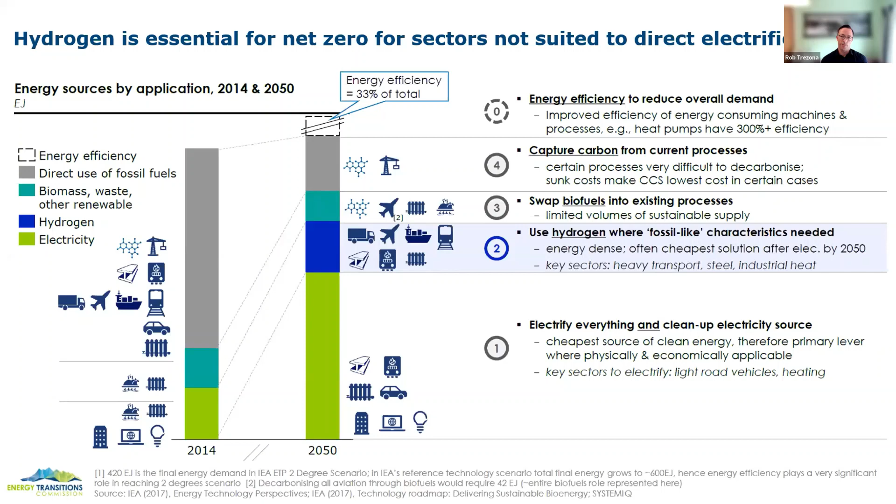And this chart shows a scenario, if you look at the middle there, 2050 energy use, where the single largest sort of energy vector is renewable power, but hydrogen there in the dark blue is a very large part of the future energy economy.

So in terms of sectors, there are three or four really key sectors where there is no plausible alternative to hydrogen if you really want to decarbonize. Those are steel, ammonia, methanol, shipping, and probably aviation.

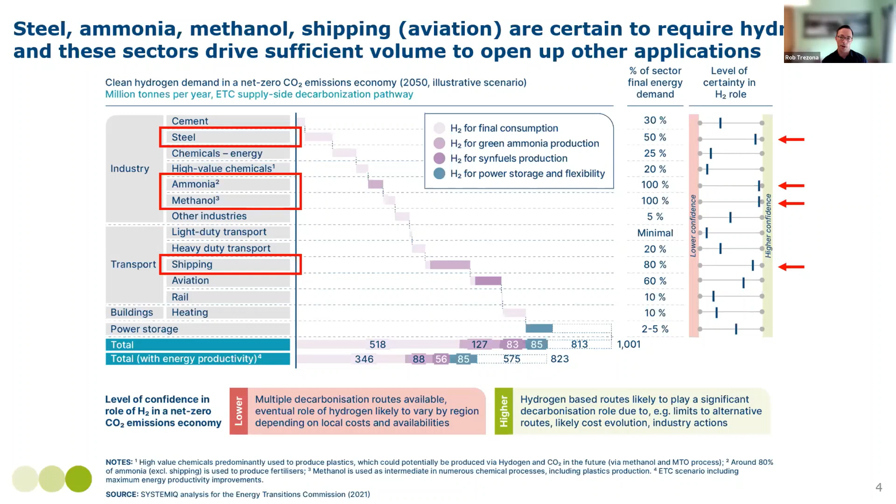Those four sectors are large, representing gigatons of emissions today. The reason hydrogen is now interesting in other areas is that if you were to decarbonize those four sectors with hydrogen, you generate a hydrogen economy of sufficient scale that the costs come down and hydrogen becomes attractive in other sectors as well.

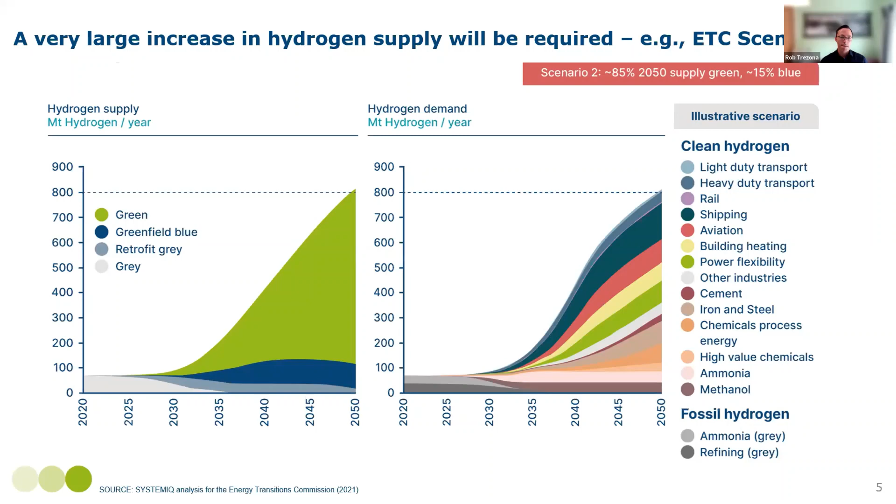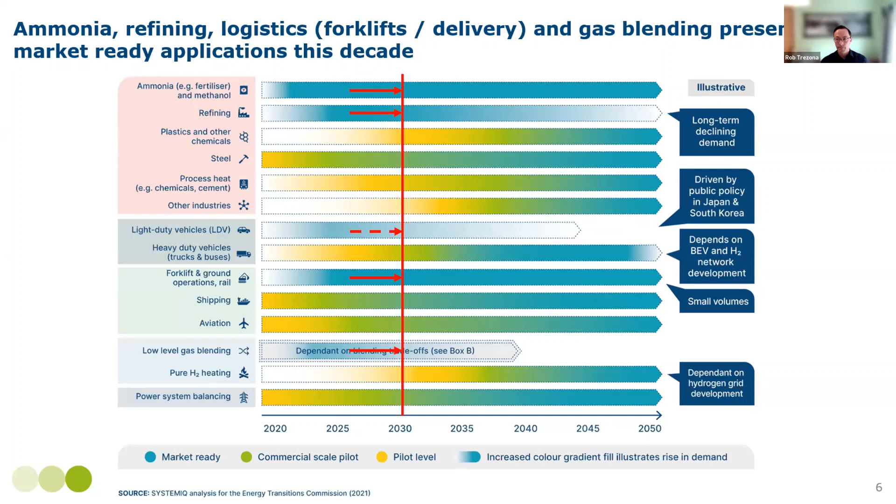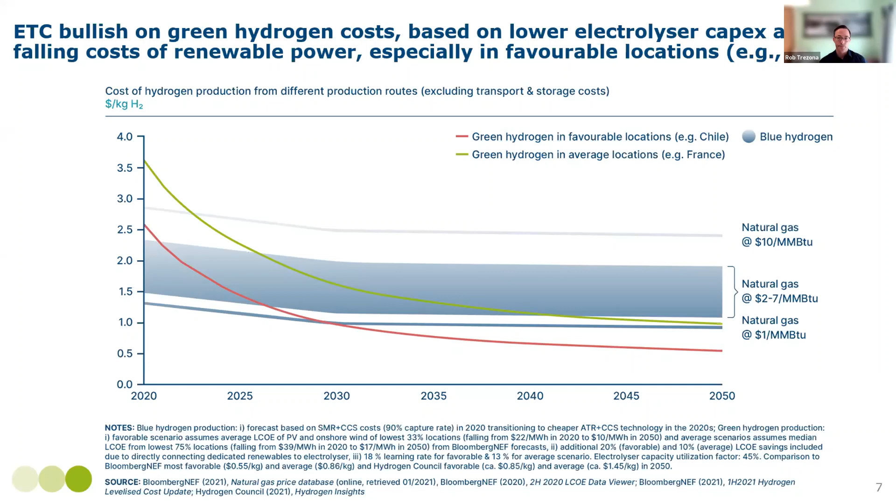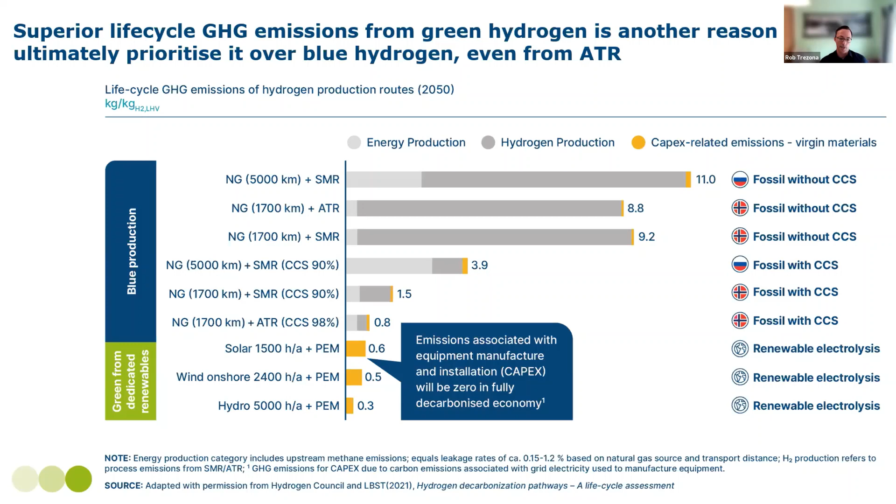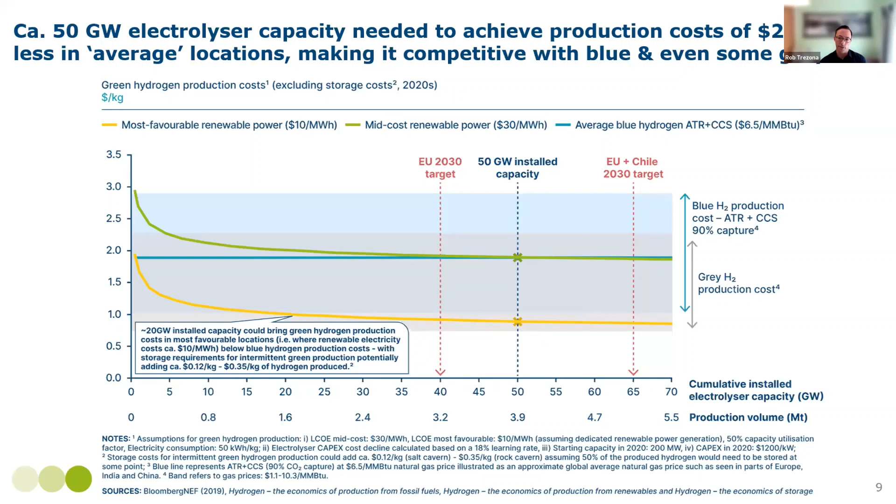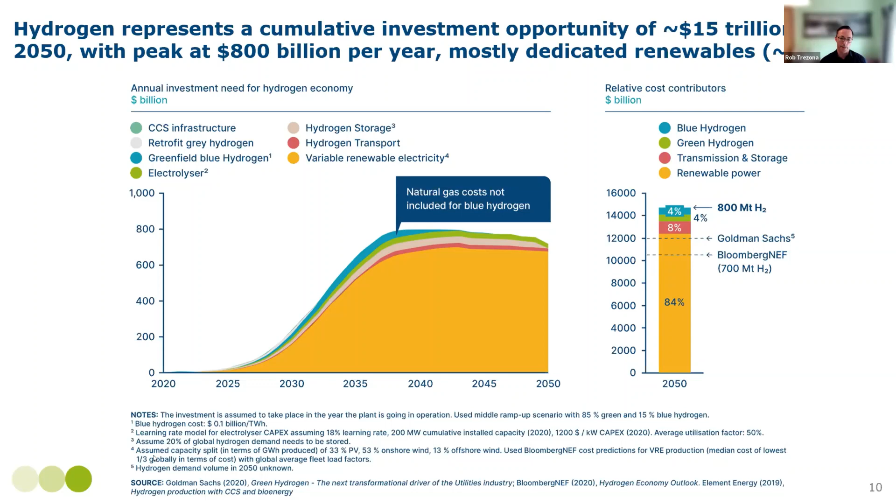In terms of the investment opportunity, this is another scenario showing for the overall economy - ramping hydrogen production from 60 to 800 megatons by mid-century, what does the actual investment requirement look like? The cumulative figure is about 15 trillion US dollars, peaking at around 800 billion per year. If this happens, this is clearly a huge new asset class, new type of infrastructure, and that's why people are so excited about hydrogen as a new player on the scene.

So really the takeaways are that hydrogen has become important now because of net zero. Not every application, as Jamie said at the beginning, is going to scale. We think people underestimate quite how cheap both renewable power and batteries will become. We're long, as the ETC view and also with IP group, on green hydrogen, although there's clearly a role for blue. Green costs are surprising me - they're coming down faster than I expected. There's going to be a huge investment requirement, and really this is new plant, so a lot of the electrolyzer production is greenfield.

Then really some thoughts on early sectors. Ammonia - today ammonia is desperately important for fertilizer, a huge quantity of greenhouse gas emissions. That is low-hanging fruit for hydrogen substitution. Also injection into refining, logistics, potentially grid gas blending, and light-duty vehicles in Asia.

So thanks for that. And with that, I'm going to hand over to Nigel, who'll talk about the role of hydrogen in energy storage.

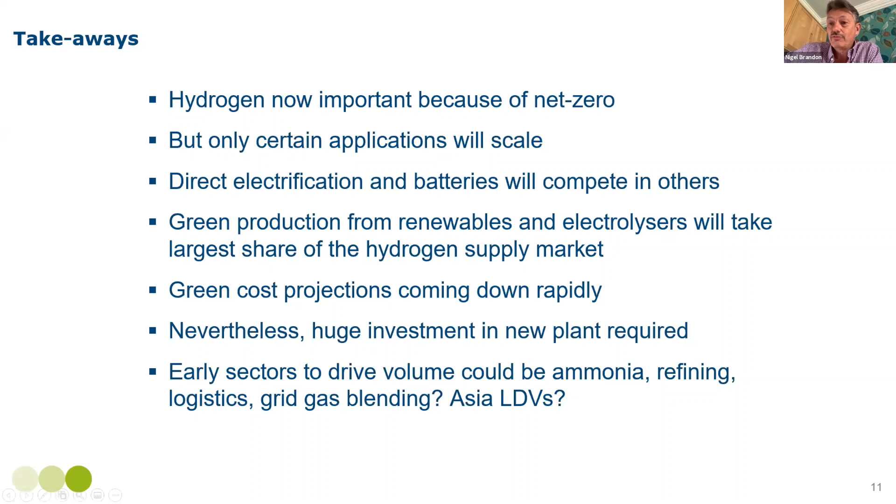Thanks, Rob. I just checked - Rob, I've switched my video and everything on okay, right? You can see and hear me? Yeah. Okay, so if you can move on, that'd be grand.

So Rob, thanks very much. I guess I'm giving this talk wearing 2 hats. Firstly, as one of the founders of an energy storage company called RFC Power, and I shall talk a little about the technology and approach we're taking with RFC Power, very much addressing the longer term energy storage market. I'm also giving this talk, I think, wearing my hat as head of the UK's hydrogen and fuel cell research programme, and happy to take broader questions around hydrogen in Q&A as appropriate.

So next slide, please. So,

Thanks, Rob. I'm grateful to my colleague Grant Wilson at the University of Birmingham. Grant and his team produced these very helpful flow pictures which show the flow of energy through the UK energy system. Obviously this is a UK specific comment, but it applies to other places as well. I want to talk about this because it brings into sharp relief some of the challenges and requirements for technologies that deliver flexibility into the energy system, of which energy storage is one important example.

The red line at the bottom of that - so firstly, what does the plot show? It shows gigawatt hours per day on the vertical axis over time. Interesting to see some of the impacts of COVID and lockdown in the UK on transport fuel demand, for example, which is that central grey line. The red line at the bottom is the flow of electricity through the UK energy system, which is actually the smallest flow of energy that we have through the system. It's, however, a very important opportunity for decarbonisation, to use low carbon electrons to decarbonise other parts of the economy.

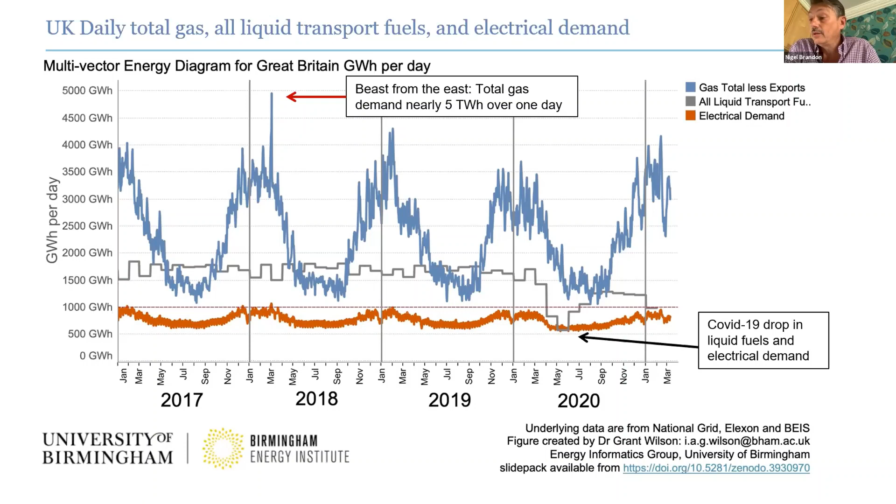This is some work my colleague has done at Imperial College, Professor Goran Strbac, and he's looked at the impact of increasing wind penetration into the UK electricity system. We will rely extensively on wind for our renewable sources in the UK.

There are two plots on here to take away. Firstly, the right-hand side says if you increase the amount of wind on the system, unless you do something about the ability to balance the system better, you will need to increasingly curtail that wind at times of peak wind generation and minimum demand. And that becomes an expensive investment in wind generation.

Or you need to invest in the infrastructure to allow those peak loads to flow through the system. But then you end up with a decreasing use of that infrastructure, and therefore a more expensive infrastructure being used less of the time, with the associated costs.

His work suggests a market in the UK alone for flexible technologies, which would include storage but not only storage, in a post-2030 UK scenario of greater than £8 billion a year, and that grows over time as we move closer to a net zero system.

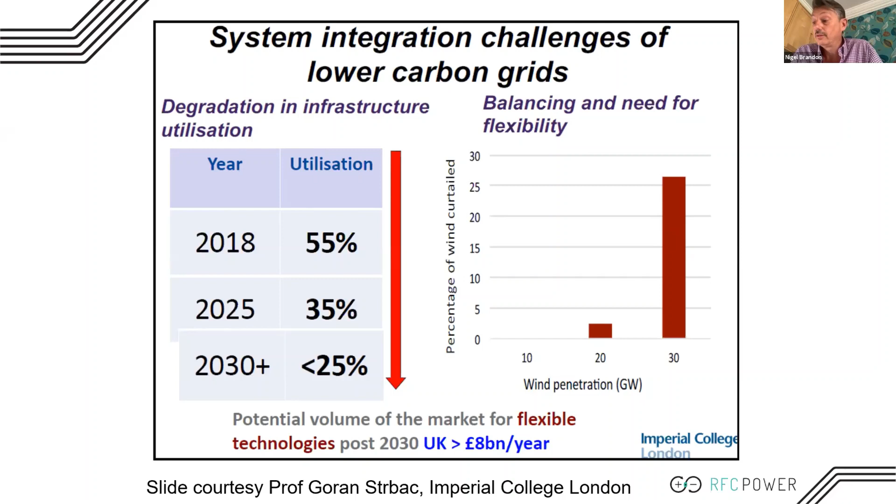Next slide, please. The other feature of this, in particular looking at increasing reliance on wind for our electricity generation, is that it's well known that in Northern Europe, we get a low in the winter in terms of wind generation. And how you choose to balance and mitigate that is a really important question.

This again is some work from Goran's group, and it looks at the impact of the number of weeks with low wind against, if you were to balance that entirely with hydrogen, how much hydrogen would you need to store. If we look at the 1 week case there, let's look at the limit, you can see that it needs about 10 terawatt hours of storage.

Now, just to put that into perspective, I don't know how many of you listening on the call have ever been to the Dinorwig pumped hydro station, so-called Electric Mountain in Snowdonia, a purpose-built, large-scale pumped hydro facility in which a 1 million cubic metre cavern was excavated inside a mountain.

That provides 9.1 gigawatt hours of storage. So we would need 1,000 of those to deliver the 10 terawatt hour energy storage just for 1 week. And clearly, I think that demonstrates the challenge.

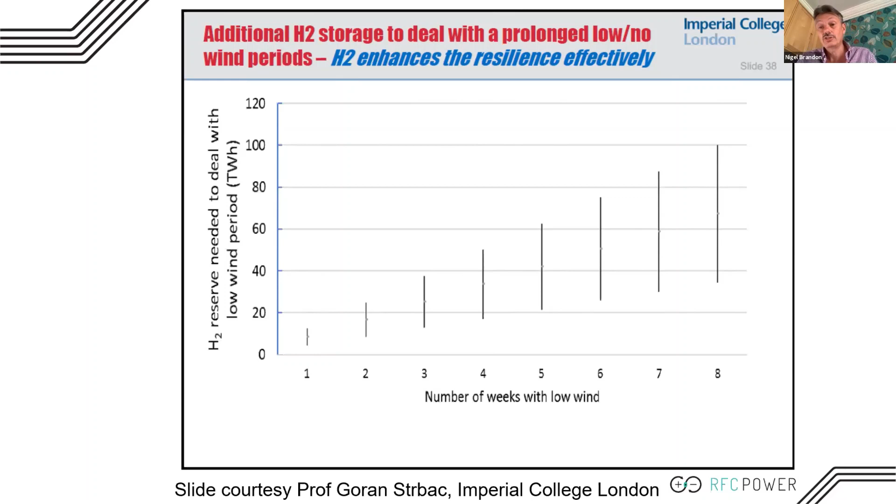There has been a really good German study looking at the capacity for underground storage of hydrogen, using solution-mined salt caverns, which are a lot easier and lower cost to manufacture and produce. They estimate that the UK onshore and nearshore hydrogen storage capacity is 2,000 terawatt hours, so far more than we would need to deliver this sort of storage. So that's an interesting question there, and an opportunity for hydrogen in longer term storage.

Next slide, please. And if we come down a bit in terms of our storage duration, and start to think about not weeks of storage, but hours of storage, this is a study from the Californian Energy Storage Alliance, looking at the 2045 situation in California, which is predicated on the Californian target of 100% zero emission power generation by 2045.

They say it's very clear that, given that would rely extensively on photovoltaic power, this would need to be met by a 10-hour energy storage system. So again, it's a longer term energy storage system than we currently need, which is often more in the scale of minutes to an hour or two.

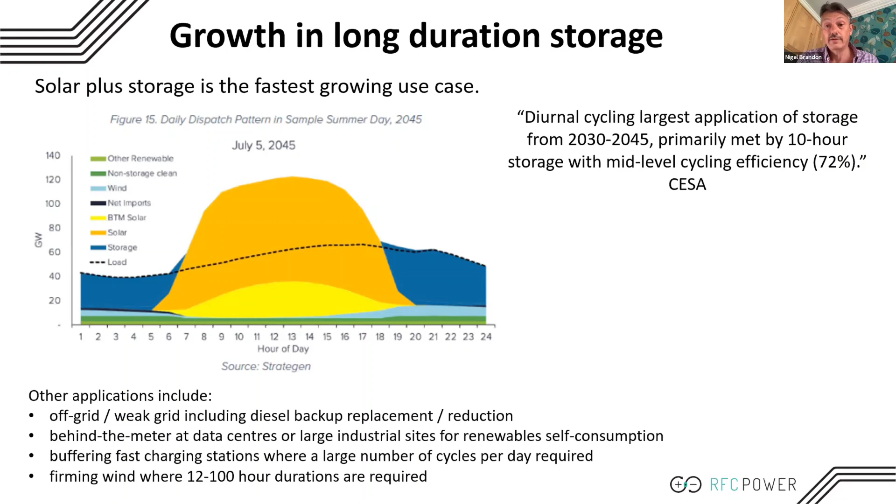Next slide, please. So this is from Bloomberg New Energy Finance. There's a lot of forecasts here which talk about the increase in the market for longer term storage, somewhere north of 4 hours. For example, these 10-hour backup storage systems for diurnal backing up of solar, or even into the longer term, more strategic weeks of storage to manage intermittent shutdowns in wind supply in the winter.

Okay, next slide. So RFC Power is a company that's playing in this space. I'm not going to tell you a lot about it, but happy to follow up with questions or pick up subsequently. RFC Power are developing a new type of flow battery.

Flow batteries are a technology well suited to multiple hours of energy storage. Effectively, a flow battery has a device not dissimilar to a fuel cell or an electrolyzer at its heart, and it produces a redox couple - an oxidized form of a chemical species and a reduced form of a chemical species - that it stores in tanks. If you need more energy, you need a bigger tank, and tanks scale quite cost effectively. So as you need more and more hours of storage, this is a good way to go.

What we've developed with RFC Power is a new chemistry. It uses a hydrogen manganese, so-called hybrid flow battery. We don't use vanadium, which is the most commonly used species in flow batteries, both because vanadium is expensive and because most of it comes from either China or Russia, so there's a supply chain concern. Instead, we use manganese using a patented chemistry. Manganese is the fourth most used metal after iron, aluminium, and copper. It's widely available, globally sourced, and low cost. Indeed, the electrolyte is only about 1/10 the price of a vanadium system.

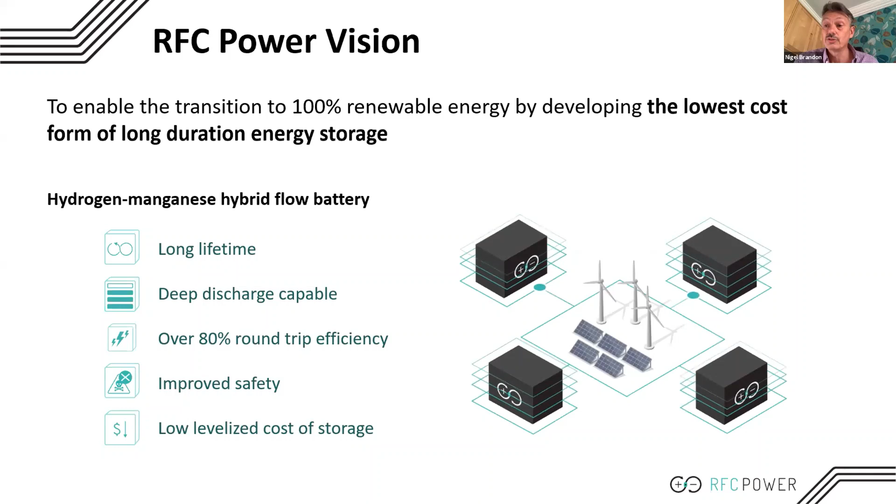It also uses hydrogen, so it can loop into the hydrogen system. One way of thinking about this: if you want to make hydrogen in an electrolyzer, which is about 65% efficient for low temperature electrolysis or about 90% efficient for high temperature electrolysis, and then convert it back to power in a fuel cell, perhaps about 60% efficient, the overall round trip efficiency is about 50% at best. If what you want to do is store energy, you can instead use a technology like this, which gives you an 80% round trip efficiency. Of course, that's not the same function as a fuel cell and an electrolyzer, but if the function of the device is energy storage, it's a far more efficient way to do it.

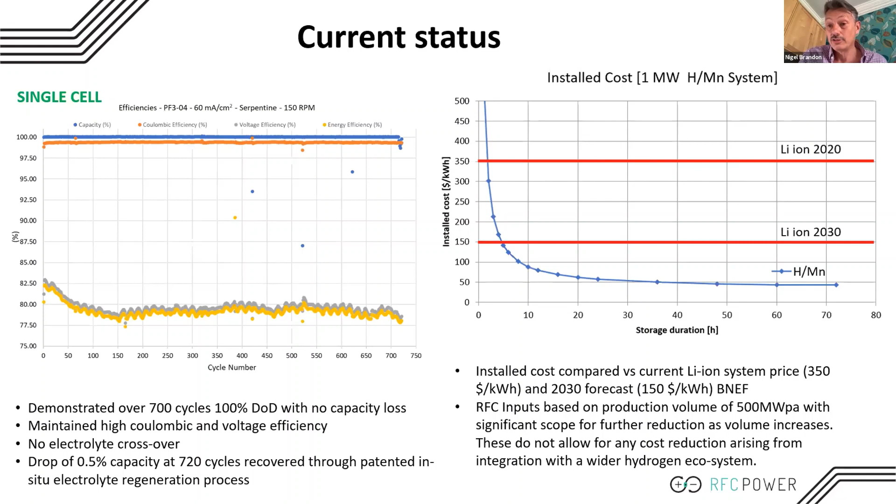Next slide, please. So this is RFC Power. Happy to take questions on it. It's addressing this very large emergent market in longer term energy storage. It does interface with the hydrogen economy as well, which offers additional benefits. We have a very broad and well protected IP set, and happy to talk about the business model as well. But Rob, I'll stop there because I'm over time.

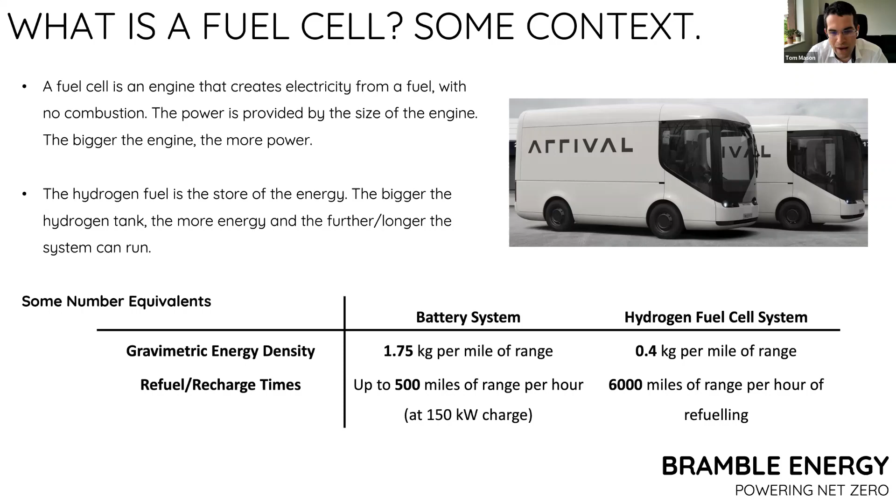So in mobility, you have these three mantras: range, weight, and cost. So give an example here of light logistics, recognizing what Rob said at the beginning about the uncertainty of where you use hydrogen. I think logistics is one of those scenarios where the uptime of that asset is very important, especially when you start considering the move towards next day retail and online shopping.

So the example given here is what Mercedes have been able to do with their Sprinter vehicle. Obviously it's very typically powered by diesel. They also produce one now which is powered by lithium ion, and you have a significant premium. You have a significantly lowered range from several hundred miles of diesel and fast fill-ups down to 95 miles of range - obviously changes seasonally - but you also significantly reduce the load capacity. Again, this is where fuel cells are favorable in all of those metrics: amount of range, amount of load carrying capacity, and we'll come to cost in a bit.

So refueling infrastructure is quite interesting. The amount of fast chargers - the charging infrastructure in the UK is growing very, very quickly. But in terms of ultra rapid chargers, so those 150 kilowatts and above, they're still very limited. We have less than 1,000. And when you consider that there are about 250,000 pure EVs on the road in the UK, I don't think anybody would really argue that the amount of infrastructure we've got is enough.

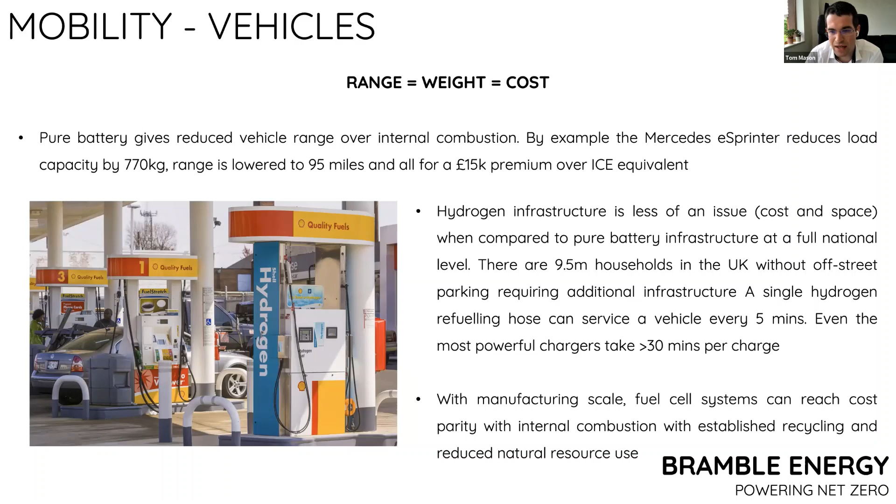So now I've got a couple of examples, one in aviation and one in marine, where it starts to put the challenge of electrification into perspective. So this is really about the advantage of hydrogen being where moving a higher mass over a longer distance is where hydrogen systems win over batteries. And a couple of numbers here.

So a 6-seater aircraft, very, very small, requires about 500 kilowatts of load. So when you start to look at the mass of batteries, you are limited then to the tens of kilometers of range. So even in Europe, that's not really enough.

When you start looking at much bigger aviation, more typical, a 737 uses about 7 megawatts of power at cruise. And so if you were to build a battery able to store that amount of energy to enable 1 hour of flight, say London to Edinburgh, London to Paris, or Amsterdam, you require about a 45-ton battery. And when the 737's gross takeoff weight is 56 tons, you can see that's just not going to work.

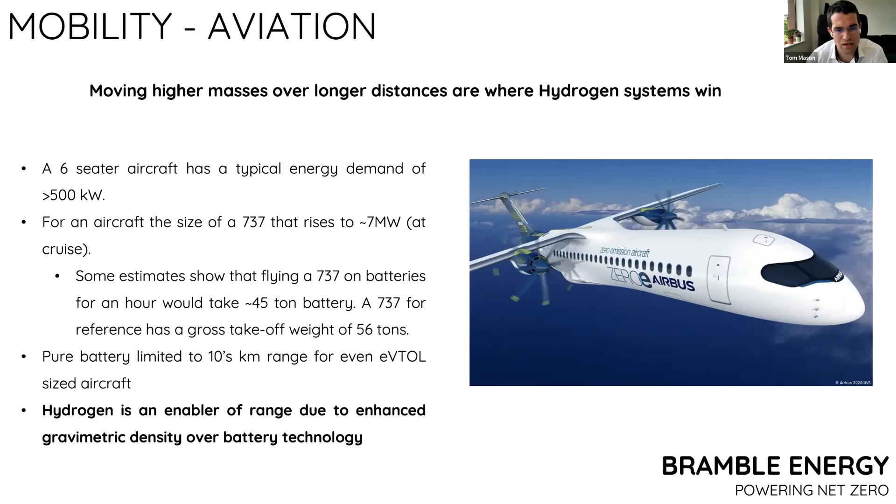And so that's where we start to see hydrogen being a real potential for decarbonising that power. So marine is where it starts to get even bigger. You saw from the ETC report that Rob showed earlier, marine is a particular example where hydrogen has a strong use case. If we look at a container ship like the one in the picture, the Evergreen that got stuck in Suez, they require about 80 megawatts, over 10 times the amount of energy required for aviation.

So from a typical trip from China to the UK, that would use about 60 million kilowatt hours of energy. You also then have the refueling, or recharging, part of that. A typical container ship of that size takes 3 days to unload, and that will require a 1.6 gigawatt connection. So again, these numbers are massive - it's more than 7.5 million UK homes, and more than any of the individual nuclear power plants in the UK can produce.

So again, it puts into perspective - that's for a single ship - the challenge of decarbonising that. Also, the asset life for marine is very, very long, and batteries are particularly challenged when it comes to decades-long asset lives.

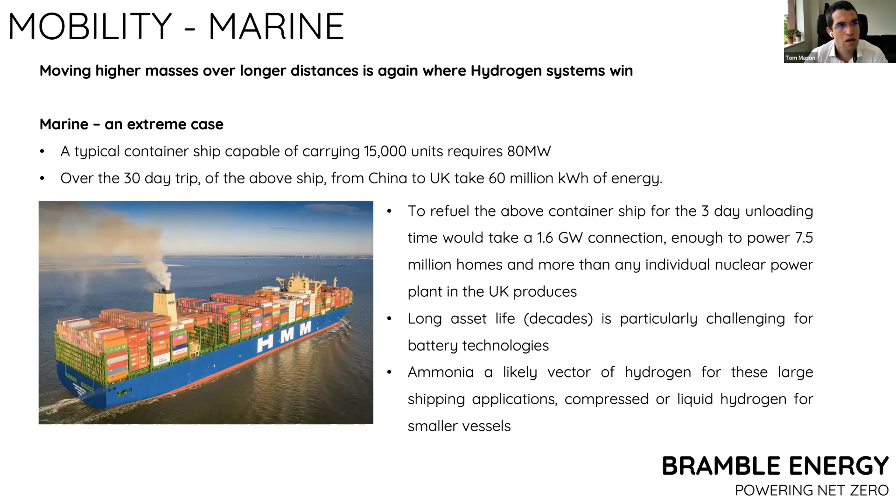So just to conclude, what do fuel cells need to be? The fuel cell is the engine for hydrogen. It needs to be scalable in manufacture. It needs to be cost effective, particularly over battery technology, but also internal combustion technologies. It needs to be durable, long life, and it needs to be easily integrated into form factors. And that's several of the advantages that Bramble Energy boasts in its PCBFC technology.

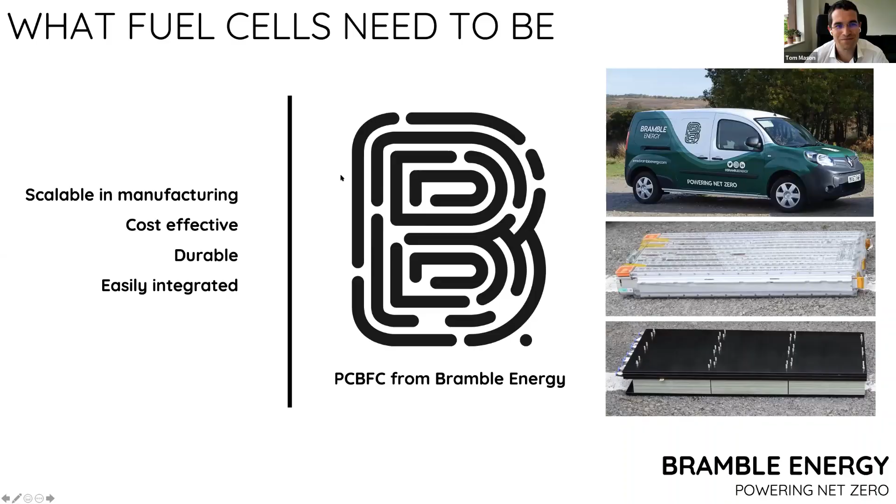Yeah, so pretty broad range of topics. I guess everyone knows Ceres Power from the fuel cell domain, but I just wanted to give you a bit of a preview of some work we're going to publish later in the year about industrial hydrogen and our work on electrolyzer technology.

In the interest of time, I won't dwell on who we are, but safe to say that Ceres has grown very rapidly over the last few years, and that's really been enabled by a very clear understanding of what our technology does, a very clear understanding of our business model, and the backing of some fantastic partners, people like Bosch, people like Weichai, people like Doosan, who've really committed to taking the technology forwards. And that's enabled us to take a step beyond fuel cells and start looking at the use of this technology for hydrogen production as well.

So we talked a lot about energy storage, energy systems in general, and particularly in the fuel cell and RFC power context. But I think one of the lesser understood parts of this story is what Rob called the hard to abate sectors - steel, ammonia, potentially synthetic fuels. Those 4 or 5 sectors on that ETC chart are really important.

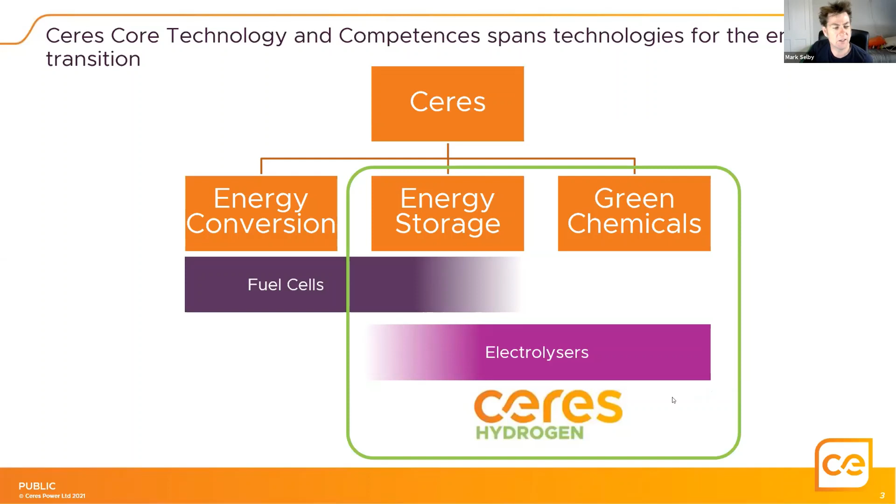So hydrogen is going to be really important, but probably in places where there isn't a very rich debate about it. I think that's one of the things that came out of Rob's chart - he had some analysis from Systemiq showing confidence and contribution to total hydrogen market. I think most people talking about hydrogen today would find that a bit surprising. So I'm going to talk about some analysis we're going to publish later in the year, particularly around this green chemicals space and integration with industrial heat sources.

So if you work back and say electrolysis is definitely going to be one of the technologies important in supplying that hydrogen, you've got a couple of routes. You always start with water, you always need electricity, and some technologies create the option for integrating with low carbon heat sources. The question I had when I first started looking at this was, is there a readily available supply of low carbon heat sources? You can start to think about waste heat from industrial plants - refineries release lots of steam, for example.

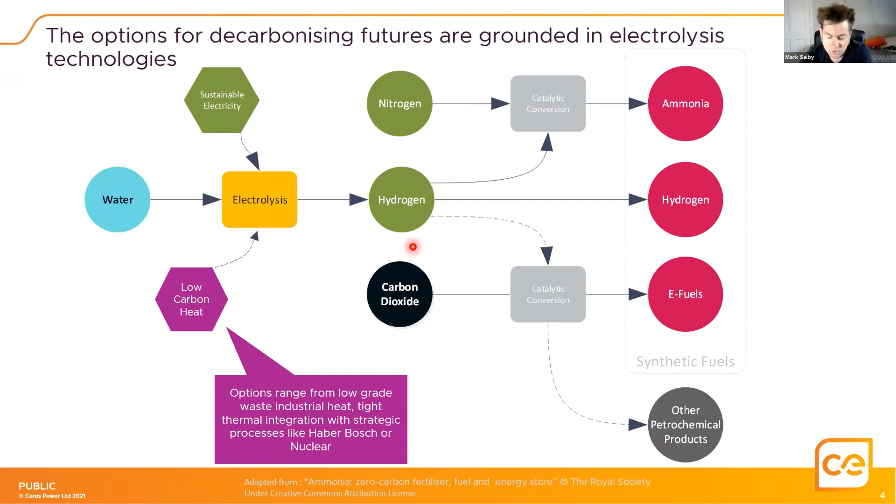So the available heat of an appropriate grade for electrolysis is going to scale as some of these synthetic green chemicals scale also. But the question is, is there an available source of heat today, or do you have the classic chicken and egg situation? Before we move on, I think it's worth talking about what flavors of electrolyzer there are. I think when people look at these massive installations of electrolyzers and see the news flow from the Middle East - Saudi Aramco, those sorts of projects, these gigawatt scale projects - they're predominantly talking about alkaline technologies.

And that's a very, very mature technology. It's been around for well over 100 years. It works, it's super mature, and it's available at large scale. If you look at companies like Nel, you'll see pictures from their pre-war systems, and these electrolyzers are already at hundreds of megawatt scale.

So they're available, they're mature, they're reasonably efficient. I would call that the incumbent technology that every other technology has to think about beating.

I would say today that the challenger technology is PEM electrolyzers. There are several people working on this. They've got some real advantages. They're pretty mature, less mature than alkaline, but reasonably efficient. Their party trick is they can play tunes on the energy system, so they can turn up and turn down very rapidly, providing grid services and matching well with highly variable renewable energy sources.

But where there's potential for disruption is high temperature electrolysis, and that disruption comes from the fact that if you're running a chemical plant or a steel plant, you need high availability of your electrolyzer, so you're going to run it a lot, high capacity factors, and you're probably going to be close to an existing grid system rather than a bespoke renewables installation. So you're going to pay a premium for your electricity, and your assets are already sunk. Efficiency and energy costs are what are ultimately going to dominate your hydrogen production.

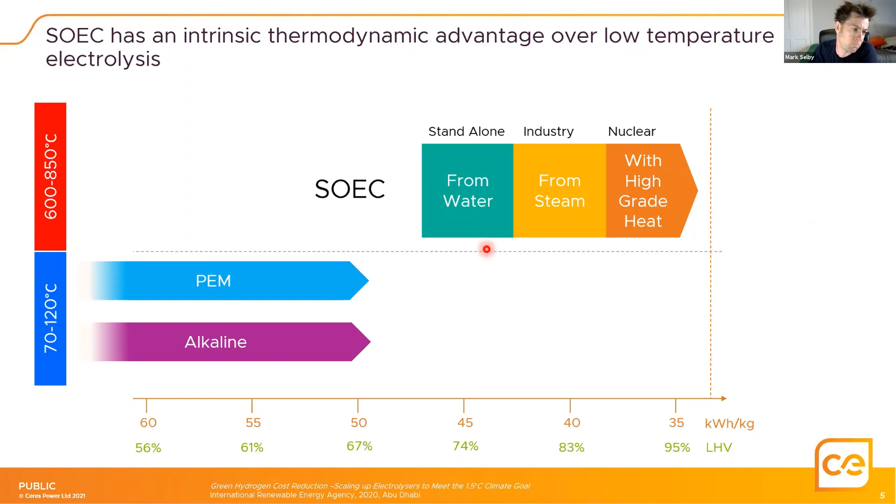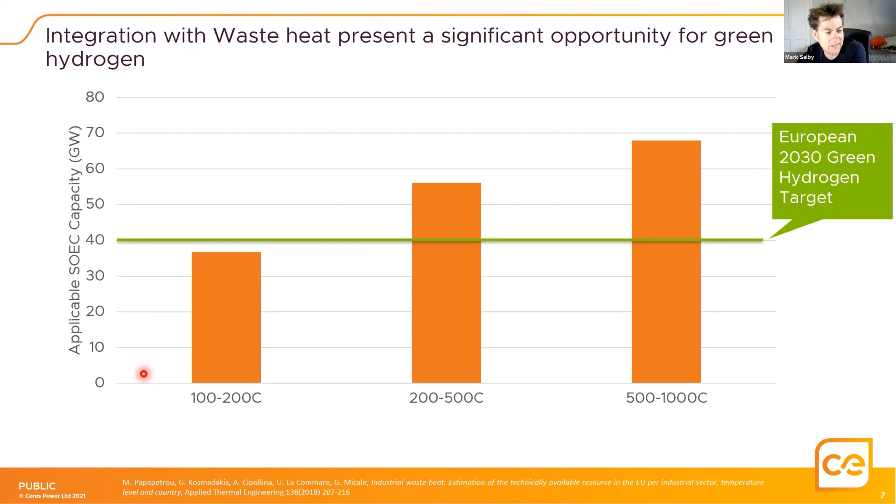If I rescale the same data and look at it in terms of electrolyzer capacity, I'm already close to 40 gigawatts, even in that lowest grade heat. I get another 60 gigawatts between 200 and 500, and nearly another 70 gigawatts at 500 to 1000 degrees C. To put that in context, the European green hydrogen target is around 40 gigawatts.

Now, I'm not for one second going to claim that all of that waste heat is available in a practical or economic way, or that all of the green hydrogen target for Europe is going to come from high temperature electrolyzers. My point is that there is a large available source of heat today at relevant temperatures for the deployment of high temperature electrolyzers. That's a really important step to growing a market.

And the point I made a few minutes ago around Haber-Bosch and Fischer-Tropsch being exothermic processes means that high temperature heat, particularly that middle bucket, the 200 to 500 degrees C bucket, is going to scale dramatically as our dependence on those green chemicals increases.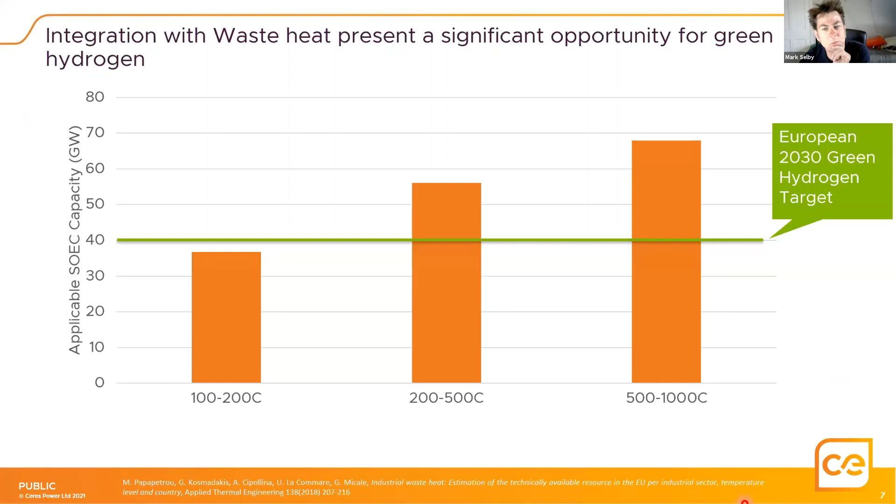Now I'm going to add one complication to this graph. We've talked about the efficiency of electrolyzers being a function of temperature. So on this green line, on this right-hand axis, the question is, if I've got heat at 200 to 500 degrees, what's the efficiency at which I can produce my hydrogen from an electrical point of view? I'm effectively counting my heat as free at this point because it's waste heat. So if I've got heat at around 200 to 500 degrees, I can achieve well over 85% efficiency. If I go even higher to 500 degrees, I can get well over 95% efficiency.

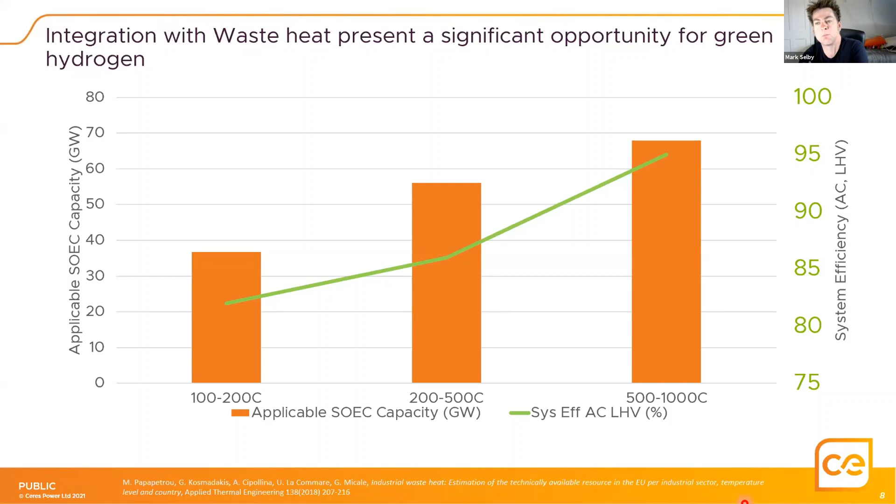So there are some really important opportunities to be taken in terms of low cost green hydrogen that maximizes the use of our resources. I think one of the things that's often neglected in the current conversation about the journey towards net zero is that not only do we need to get carbon out of the system, we also need to do things much more efficiently. We have to reduce our total consumption of primary and final energy in order to make the progress we need. And therefore, systems like high temperature electrolysis that provide these very high efficiencies are going to be extremely important.

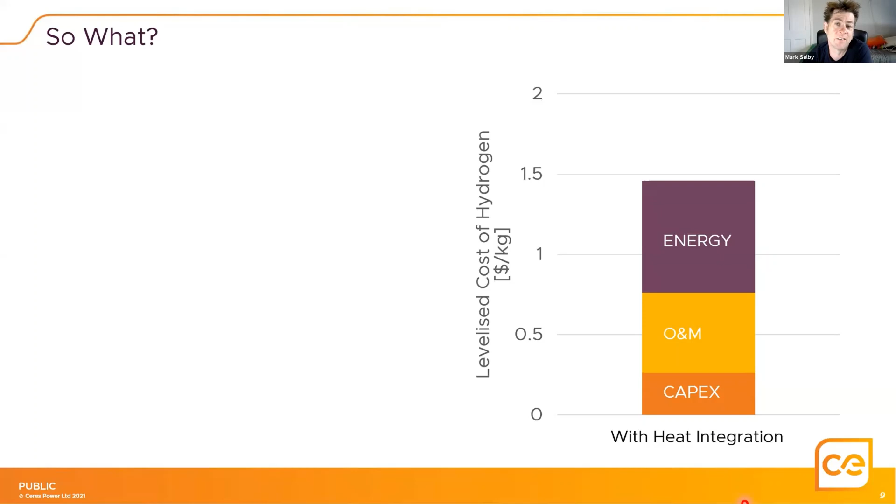So what does that do? Rob put some numbers about glide paths for green hydrogen over the next decade or two. And if we take relatively conservative assumptions about energy cost and capex for these technologies, we can already see well within the next decade, certainly the second half of this decade, that with high temperature electrolysis, relatively low grade heat, but integrated in a thoughtful manner, we can already get sub $1, $1.50 a kilo of hydrogen. That's really important when we think about decarbonizing challenging sectors like steel, agrochem, or petrochem.

So high temperature thermally integrated electrolysis systems are going to be key technologies for the hard to abate sectors.

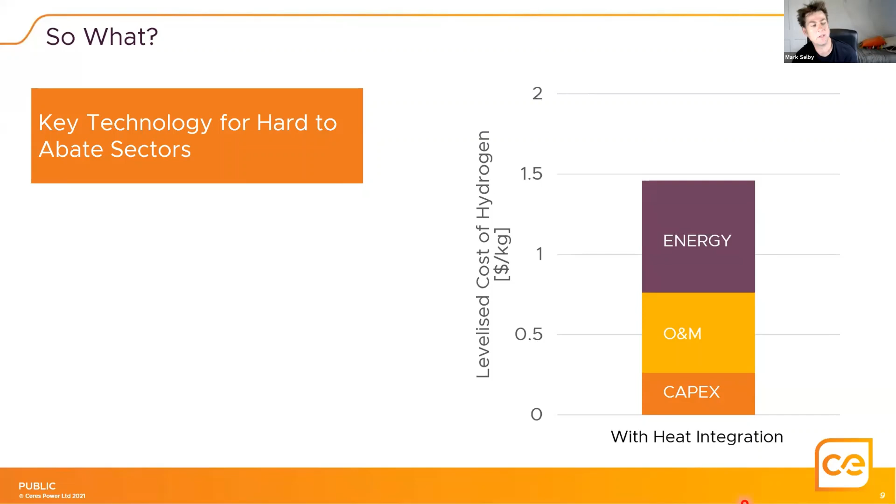They're going to be really fundamentally important for e-fuels. If you look at processes like Haber-Bosch and Fischer-Tropsch, the level of differentiation with a high temperature electrolysis technology is really quite staggering compared to lower temperature PEM and alkaline. So that's likely to be a sweet spot. If you believe in synthetic fuels, if you believe in green chemicals, you almost by definition have to believe in high temperature solid oxide electrolysis.

A key thing for us, and for the whole sector actually, is the rate at which these technologies can scale. A key premise Ceres is working on, and we're demonstrating this technically at the moment, is that the same technology we've licensed to partners like Bosch, Doosan and Weichai can be used as an electrolyzer technology.

That's really important. If you look at Bosch and Doosan today, they've committed to bringing on production of fuel cells of around a quarter gigawatt by 2024. Now, there's a quirk of the thermodynamics that means we get about double the power density in electrolyzer mode compared to fuel cell mode. So already there's the option to produce roughly half a gigawatt worth of electrolyzers by the middle of this decade.

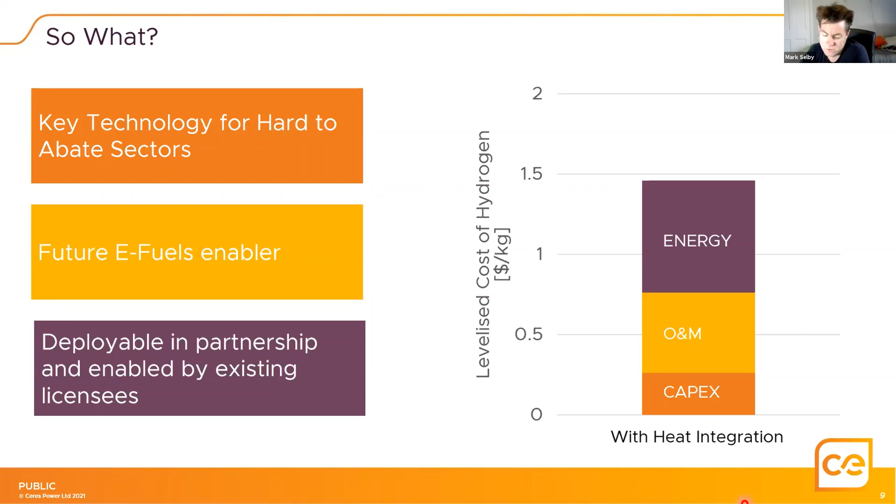So I'm going to leave it there. I went at a bit of pace to try and catch back a bit of time. I hope that helped.